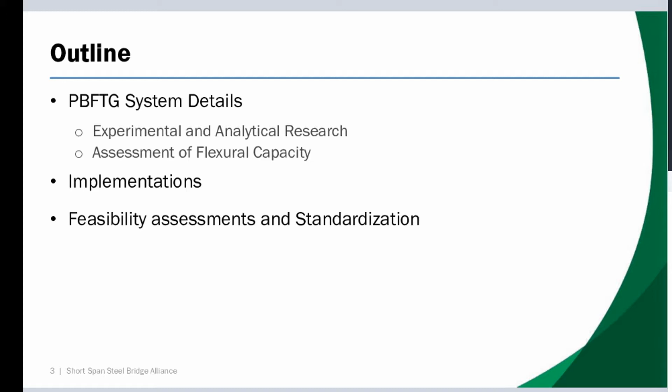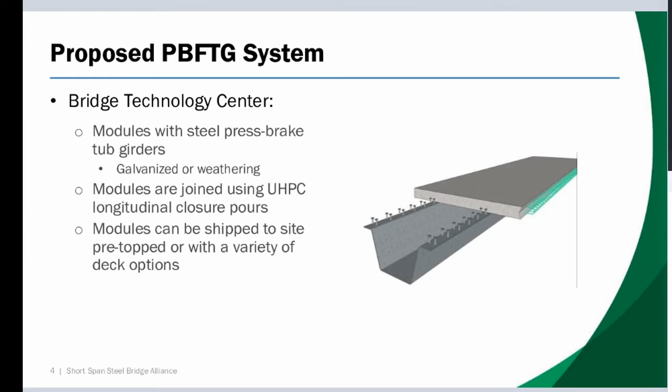But there's a variety of means by which you can employ a deck. You can bring the girders to site in a non-composite fashion and conventionally pour a deck. You'll see actually the first application that we did with the girder was done in that manner. There's also systems that utilize steel sandwich plate systems, and you'll see a demonstration bridge that we did that utilizes that. So there's a variety of different deck options that you can do with that.

So the work really came about as a challenge to the steel industry from the Federal Highway Administration to produce a structural shape that would be economical for modular steel bridge construction in the short span market. Myself and a number of our members got together in Chicago, about 7 years ago now, in a technical working group meeting to discuss various forms that we thought would be successful, and ultimately selected this as the one. Then we initiated at West Virginia University an experimental testing program to be able to assess and evaluate this technology and further develop it into commercial utilization.

So we take a standard mill sheet of steel, 84 inches, 96, 120, and we place several constraints on that. We have a top flange width, and we selected that to be 6 inches, so it was wide enough to get 2 shear studs on there. We have a bend radius of 5 times the thickness of the plate so that we are consistent with what will be the AASHTO specifications for that. And we use a conventional trapezoidal tub girder web slope of 1:4, which is what's normally employed in larger welded tubs. So given those constraints, once we then input depth, we can get the maximum moment capacity of the section.

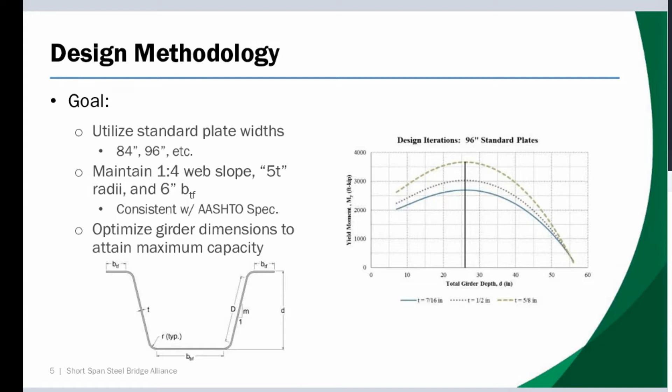We varied those depths and all other aspects of the plate geometry, and given those other constraints, everything else falls into place. We tried to determine the maximum yield moment we could get to optimize the shape. This plot shows a 96-inch wide plate utilizing various plate thicknesses, and you see that results in about a 26-inch deep plate.

We performed that same design for other common standard plate widths, which produced a set of girder depths for each. For example, you'll see later a double girder module we looked at early on using 60-inch plate, which gives a superstructure depth of 12 inches for the girder section itself.

I should also mention that if you go to the Short Span Steel Bridge Alliance website, there's a series of reports published there providing background information, section property data, and documenting all the experimental, analytical, and field assessments we did. It's quite a big amount of data. As you look at utilizing these systems, you can reach out to us or to our member partners involved in the commercial production, application, and sale of these systems.

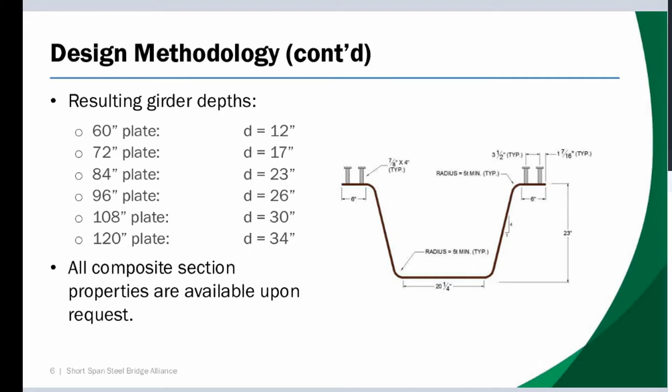Once we had done that, we decided we needed to do large-scale experimental testing, and we selected a plate fabricated from an 84-inch wide by 7/16-inch thick plate as the specimen for our laboratory. The main reason that one was selected is because we have a maximum applied load capability of 330 kips, and if we'd used a larger girder, we wouldn't be able to fail that specimen.

You'll see a plot in a few slides of the load deflection response for one of these specimens, where we're pushing 315 kips or so, which is an awful lot of load.

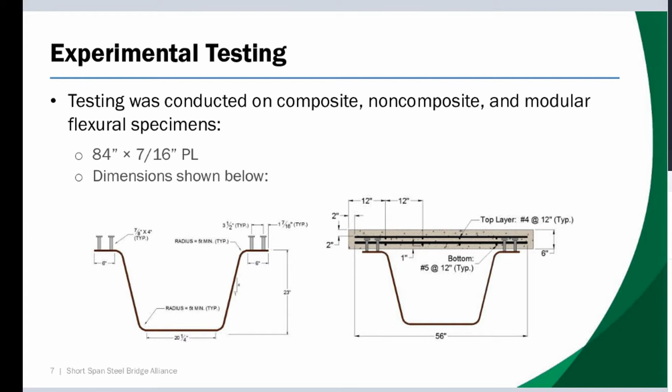We took the 84-inch wide, 7/16-inch plate and had it fabricated into tub girder dimensions, then placed a reinforced concrete deck on there to initiate experimental testing. We've tested composite sections, non-composite sections, multiple girder modules, and fatigue loading. We've run the gamut of possible scenarios for testing and evaluating that system, and it proves itself to be very, very robust.

Here is a series of pictures from the experimental testing. In the upper left-hand image, that's the production of one of these girders. Essentially, one takes a sheet of steel and places it in a large commercial press brake, putting four bends on it to create the top flange bends, then turns it over and bends to create the web bends.

Once you have the jigs and everything set up, you can produce the girders in less than 45 minutes in a typical setting. There are a number of commercial press brakes around the country, and most are limited to a maximum width of 60 feet. So 60 feet or less tends to be the sweet spot for these, but they're applicable to span ranges exceeding that, up to about 100 feet for certain plate configurations. One could just use an additional splice if using girders in lengths that exceed the available press brake width.

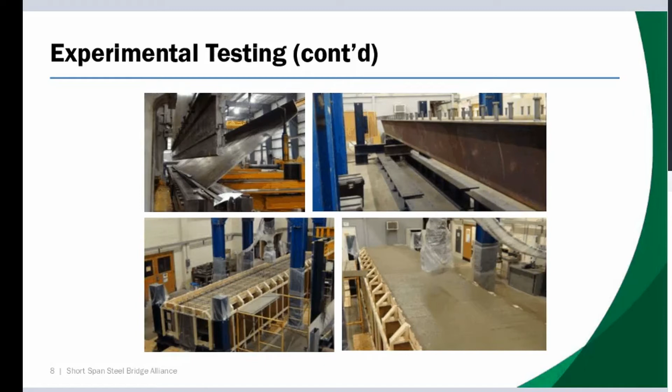What we've done in the lab to form the deck was simply use sacrificial plywood formwork. In a later application you'll see, done here in West Virginia on a challenging site, the material supplier elected to use this same forming method, and it was quite successful. You could use stay-in-place metal formwork or this sacrificial plywood formwork, whatever suits the project. We formed it up in the lab, poured a deck, and allowed it to cure for at least 28 days.

So we're testing that in bending in this particular test, to evaluate maximum capacity and the stresses, strains, and deflections in the girder and those types of things.

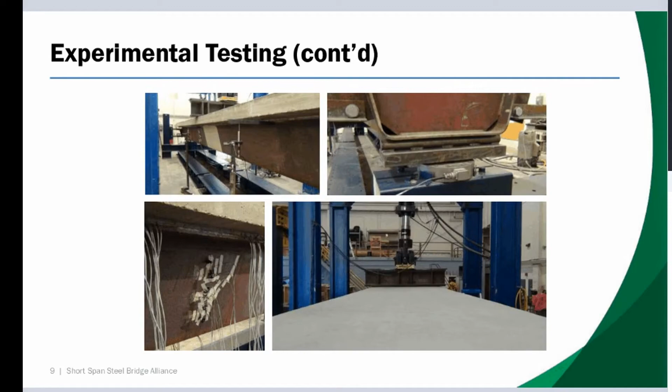Here's a neat shot - the left-hand image is the girder when it's reached its maximum moment capacity, and what you see is exceptionally small deflection. Once you have a closed tub girder shape, the moment of inertia is orders of magnitude larger than you'd get compared to a conventional I shape, so they're very, very stiff systems.

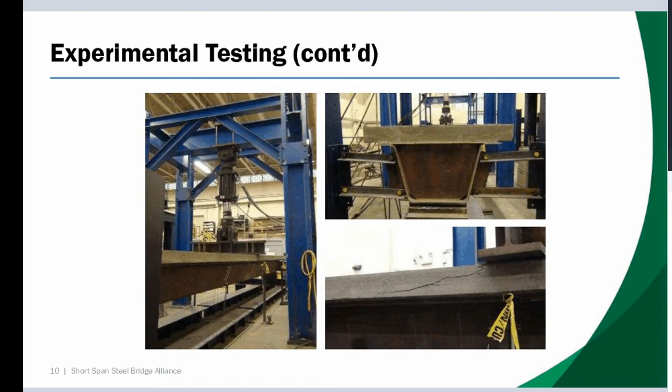You would start to see the concrete deck crack. You start to lose moment of inertia and get larger deflections. So this fails the same way as a conventional I girder would fail, through the ductility of the cracking in that concrete deck.

These, as you can see, are big tests to set up and conduct, and they take a long time to perform. So in order to research other aspects of these, we want to develop modeling that's successfully capable of capturing their behavior.

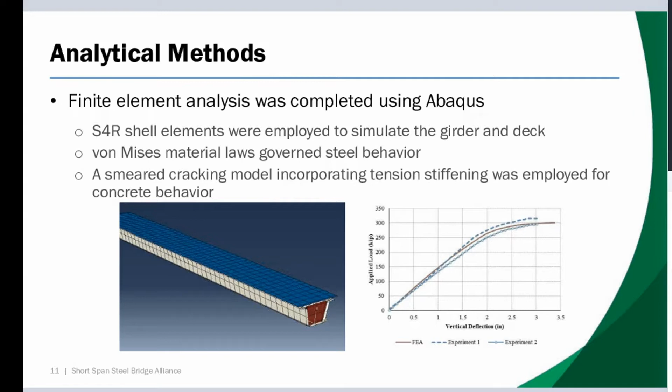And if you had a plot of I-girder ductility checks like this, you'd get that same conservative behavior there. So AASHTO conservatively predicts the maximum moment capacity of the section.

So we oftentimes get questions - well, how do you check the capacity? And we just use AASHTO 6.11 for tubs, and it's successful.

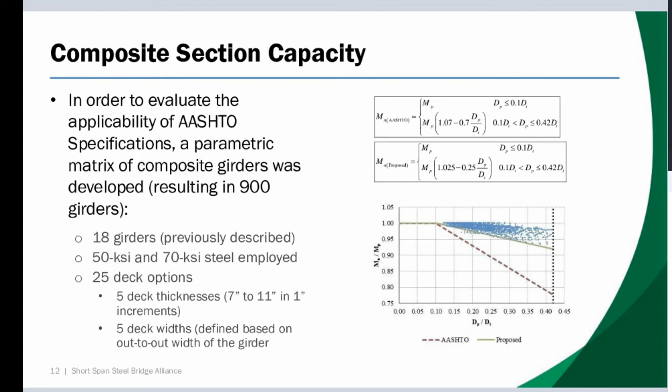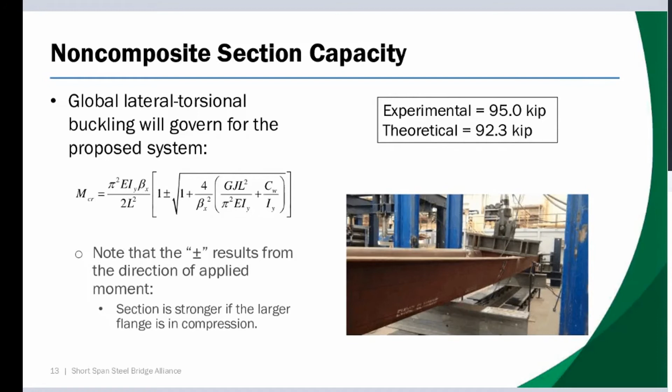We also wanted to look at the performance of joining these with ultra high performance concrete. So we did a 2-girder system where we wanted to evaluate the efficiency of that joint over the predicted lifespan of the bridge and determine how successful that would be.

We built on work done by Dr. Ben Graybeal at Turner-Fairbank, where he looked at a whole host of different edge configurations and mixes. We basically took the one found by Dr. Graybeal to be the most successful and employed it in this system to assess its capabilities.

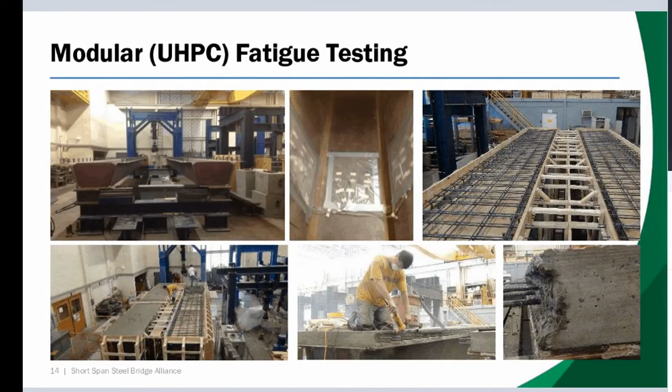Once those girders are set up, we move them close together so you're able to develop that joint over just a 6-inch spacing between the girders. Here you see the forming that's going on there.

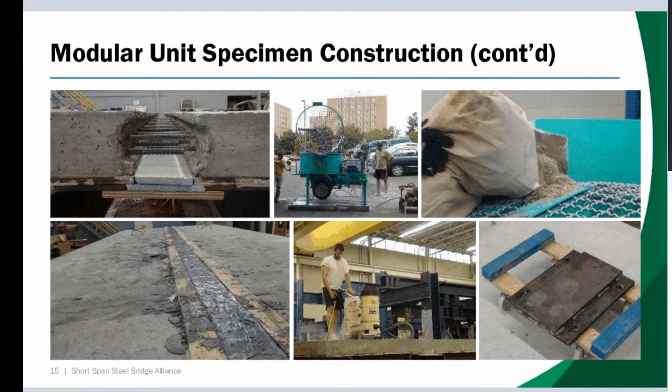And then for the application just completed in West Virginia, they had a grinder come out and grind the surface of the bridge, and you'll see an image of that.

We determined what load applied at midspan would produce the strength 1 moment, what load would produce the service 2 moment, and what load applied at midspan would produce the fatigue moment. We predicted the fatigue life for this, and it came out to be about 2.7 million cycles.

So what we did was apply that fatigue load over a range of about 100,000 cycles. We would stop that, and then apply the load up to the service 2 load, incrementing it in tenths of that load, and evaluated the stress and strains.

What you would suspect is, if the UHPC joint was not working, then over the life of that bridge you would start to shift more of that load away from the unloaded girder into the loaded girder. We found that not to be the case, which means that joint worked very well over the predicted life of that bridge.

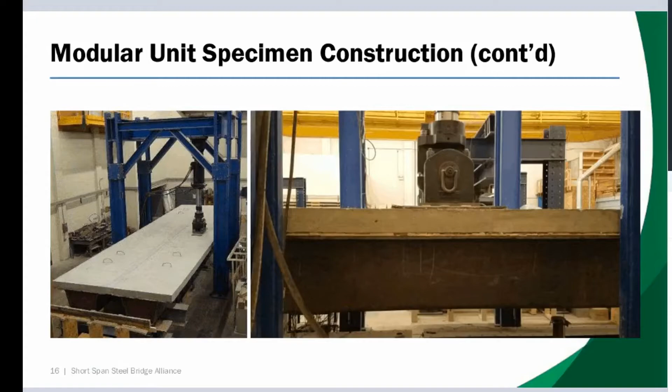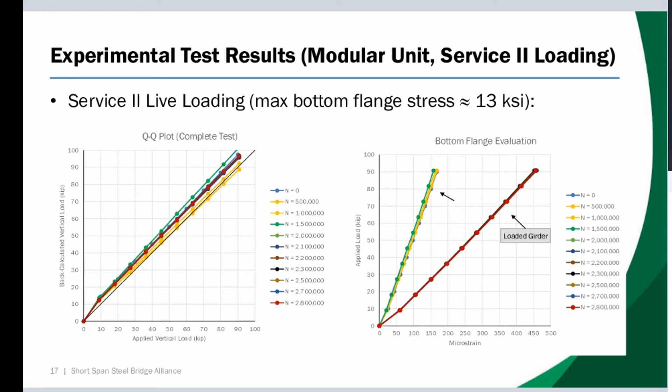There's been a number of applications utilizing that very successfully. This plot demonstrates that. What I'll key you in on is the right-hand plot: the loaded girder and unloaded girder, and the applied load versus strain over a series of loading increments—500,000, a million, et cetera, all the way up to 2.8 million. You see essentially no shift in the load pattern, indicating that UHPC joint was successful over the expected life of the bridge.

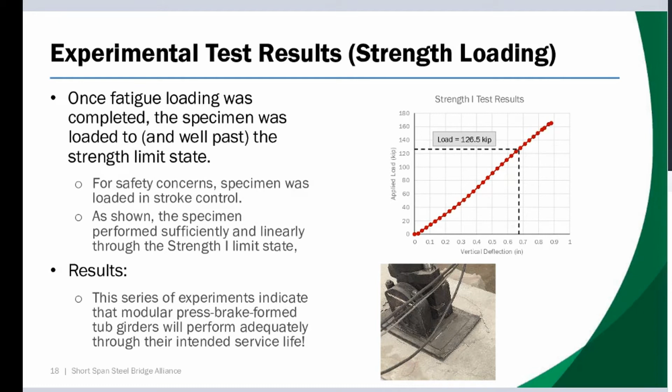This shows a plot of taking that up to failure. The predicted strength one load at midspan that would produce the strength one moment was 126.5 kips, and you see it behaving linearly up to there, continuing to exceed that load. Ultimately, because we chose a load pattern simulating the AASHTO wheel load size, this test failed through punching shear through the deck.

After the first three years of development and testing, we were able to put the first bridge in Buchanan County, Iowa. Brian Keierleber is the county engineer there, and he applied for and received a grant to assist in the construction. Here you see the image of that bridge and the ribbon cutting that was done.

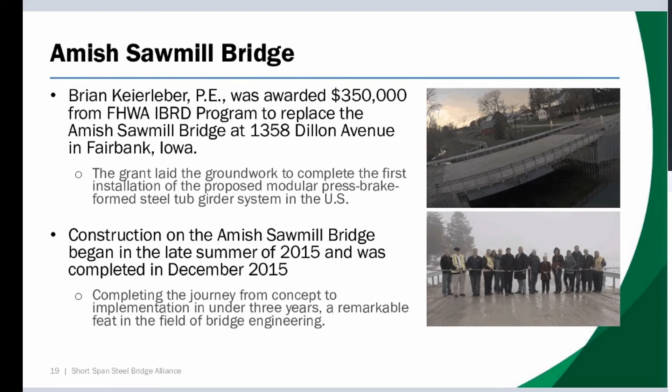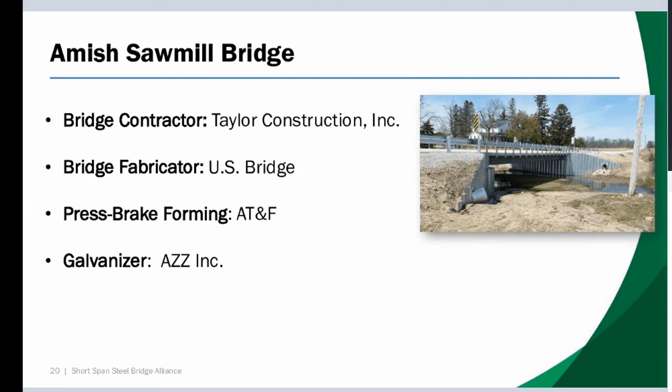We then went and performed experimental testing on that. These are the companies involved in the production of the Amish Sawmill Bridge: the contractor, the fabricator, the press brake former, and the galvanizer. They used a GRS abutment, and you can see that image of that GRS wall that's there for the abutments.

We went out and used a removable test system that we have, using wireless sensors screwed onto tabs placed on the bridge with adhesive. The left-hand image shows what one of the strain gauges looks like, with a wire coming out a short distance to the wireless node shown in the middle, which then sends the signal to the data acquisition system.

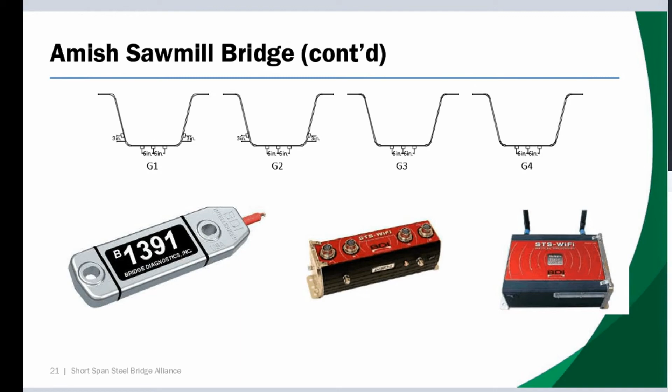So what we did was instrument the bottom flanges and webs of two of the girders. Then we took a loaded vehicle out and ran it both transversely and longitudinally along a number of lines that would maximize the load in a one-lane or two-lane loaded position for each of the girders, and then we looked at the distribution factors.

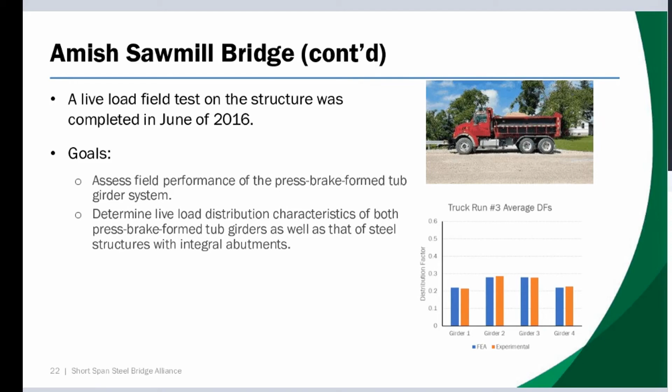Here you see those distribution factors being plotted for each of those girders. What we don't have on this plot is the distribution factor you'd see from AASHTO, but you would see that it would be conservative relative to this. So simply designing these as tubs from AASHTO is fine, but since we provide standards, you would not be designing these as one-off each time.

We've done several other demonstration projects. Here's one in Muskingum County, Ohio, and this bridge actually won a National Steel Bridge Alliance Technology Innovation Award.

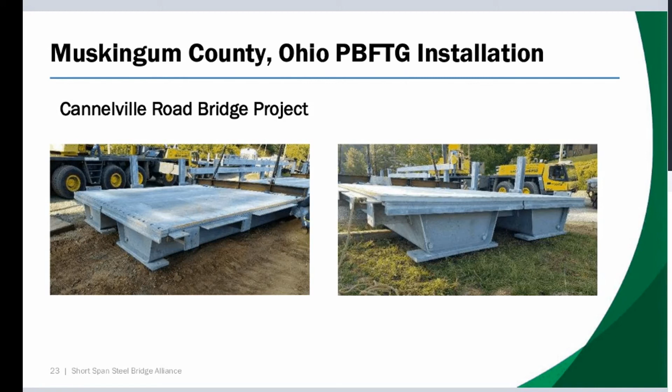This combines the tubs with a sandwich plate system. In this particular bridge, the entire bridge came out as two girder modules on one truck, and the contractor did the main erection in under 20 minutes. They basically picked one module up, set it on the bearings, picked another module up, and bolted them together, completing most of the superstructure in under 20 minutes. When we talk about accelerated construction, I don't think we can get much quicker than that.

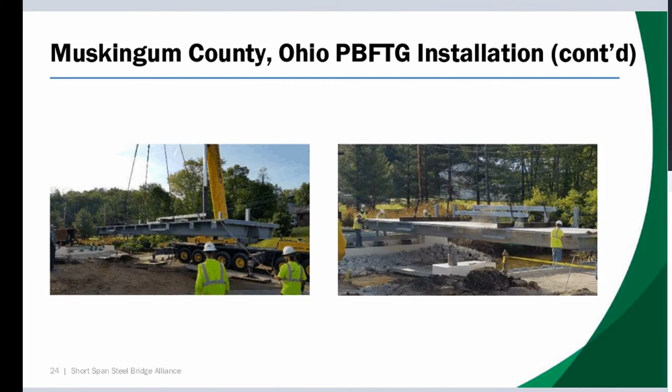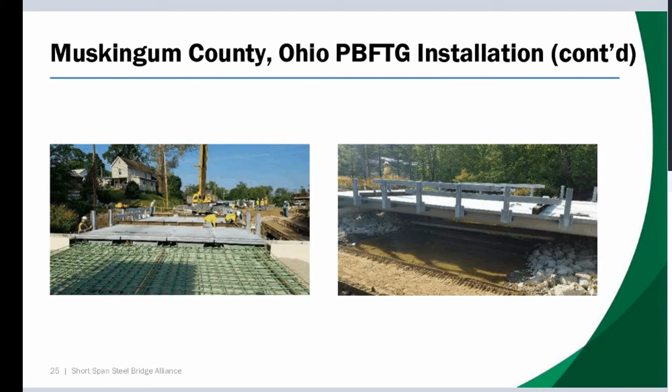We similarly performed experimental testing on that. Here you see a couple of images of them picking those modules up and placing them, using the same removable data acquisition system and employing the same testing we had done before. Here you see what the bridge looks like once those girders were in place, and in the right-hand image the railing being bolted onto the posts on the edge, along with the forming of the approach slabs.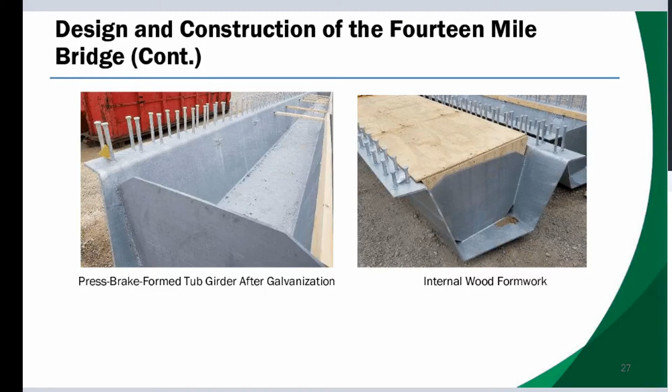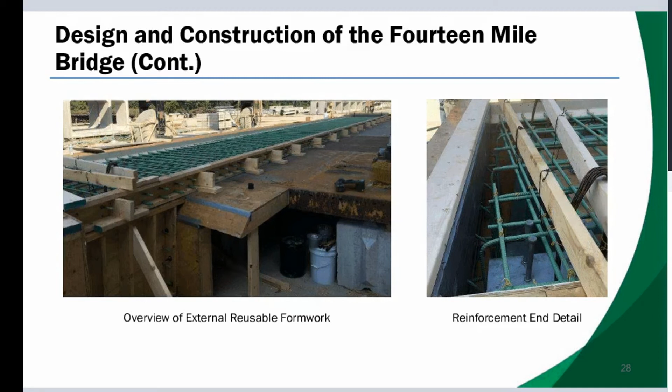Here's forming of the deck. They used reusable formwork on the outside of it. You can again see that skew in the right-hand image. And you see that rebar coming out from the deck forms, where it's going to be employed in that UHPC joint. So this was a very successful application of the girders.

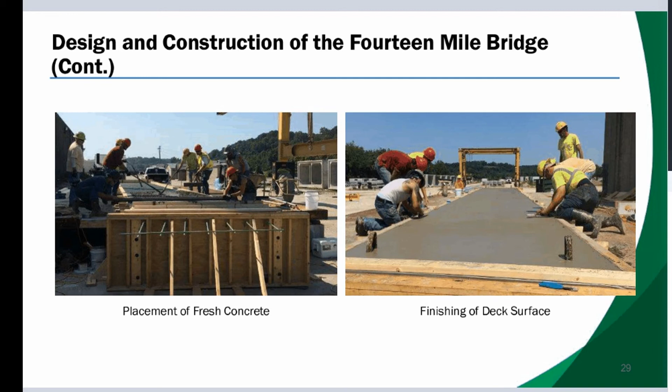Here is them placing the deck and then finishing that. And then you'll see a couple of images of that bridge being erected.

In this application, the bearing seats were poured integral with the girders, and you see that module being brought out to the site. There were 5 girders, and they came out as a single girder on 5 different trucks. They simply lined the trucks up, took one girder off and placed it, and that truck would move out of the way and they would bring the next truck in.

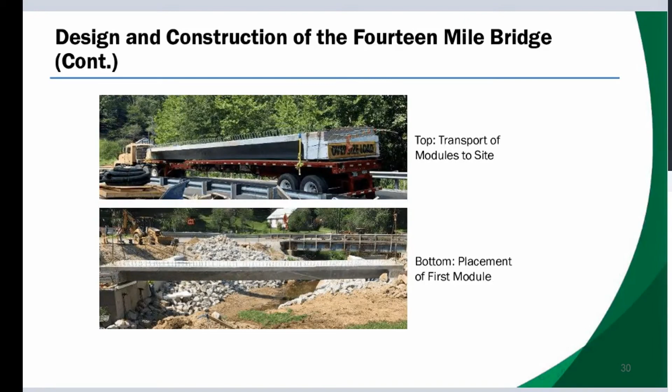So you see that first module being placed on the abutment back walls there. Here's a couple more images that demonstrate the site - you can see the skew on the site, and that truck being brought around through a temporary bridge. It was kind of cool - the DOH brought out a drone to do some aerial recording of this, and that video is really pretty neat to see.

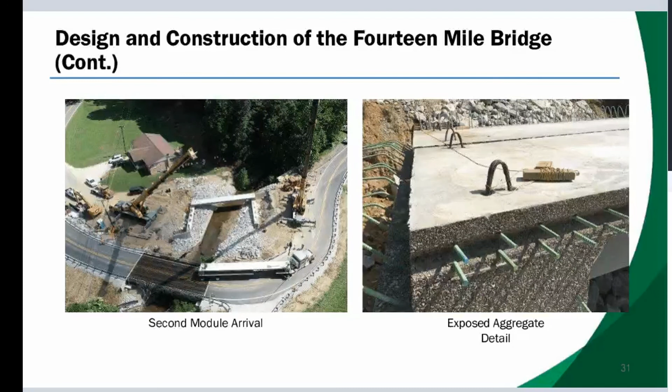You see on the edge of this where one of the modules is next to another one, that exposed aggregate detail that was discussed in the laboratory work to be able to adhere the UHPC to it. And here's them pouring the UHPC into the joints. The contractor was able to successfully do that. Then you see them using a diamond grinder on there to finish it.

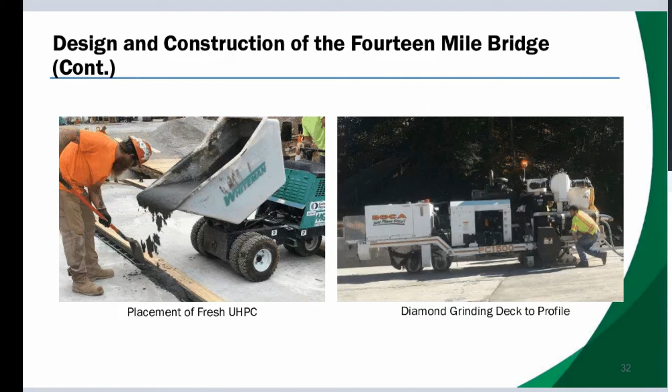We have one other demonstration project going on in District 4, and that should be going in the fall. A number of our members involved in this have placed numerous other ones of these bridges very successfully. It's a super economical and super robust system to use. I would suggest whenever you have need for bridges in the span range, that this is something to definitely be considered.

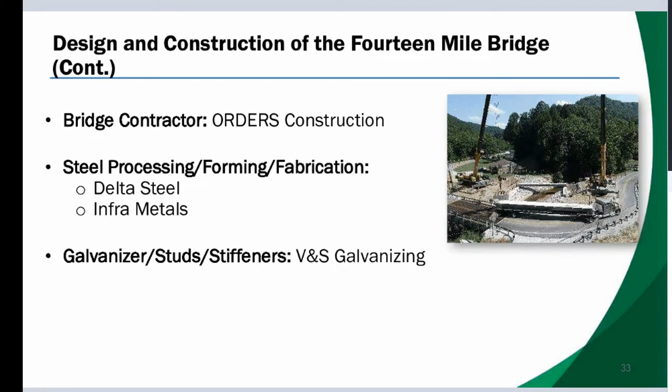These are the people who were involved in that West Virginia bridge - you see the contractor, the steel supplier and fabricator, and then the galvanizer was V&S Galvanizing.

One of the things I've alluded to several times is you don't need to design these every time. We want to move as an industry, not only in the tubs, but with I-shaped girders, plate girders, and wide flange sections into the notion of standardization. So we'll have 3 different span ranges in which a different section is recommended to be utilized.

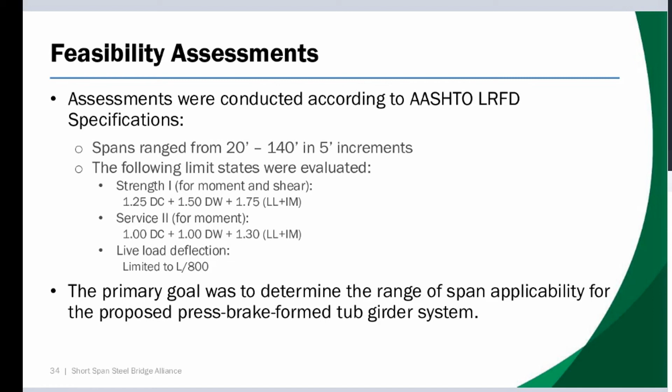What we did was simply vary the span range from 20 to 140 feet in 5-foot increments and look at all of the applicable AASHTO limit states for those, in order to try and determine the span range of applicability for those different plate widths shown earlier. That results in a series of plots like this - this is just for the 96 by a half. What you see is demand versus capacity, and wherever the demand in blue exceeds the capacity, that would be the maximum span range applicable for that given limit state.

So, for example, you look at shears. There are two webs, so you never exceed shear capacity. They're just buku strong for shear.

You see in the upper left the plot of capacity versus demand for strength 1 moments, and demand passes the capacity at just over 60 feet, around 63 feet. So that would suggest that utilizing the distribution factors we utilized and that plate size would be applicable for spans up to 60 feet.

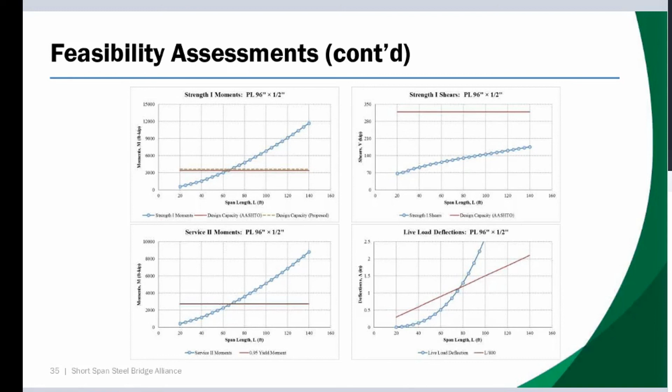So the shortest one of those would be the maximum span, right? Wherever you violated a limit state first would be the maximum span you could utilize.

So here you see for all those different plates that we had discussed early on, a series of plate thicknesses, and the AASHTO versus a proposed limit state that we had worked on early on. Because AASHTO worked so well, we've not worked to advance that. So that's what the red and blue are, a limit state we developed from that cloud of data. But I'd key in on just the AASHTO plot for each of those.

And so you see for those different plate thicknesses and plate widths, maximum span ranges of applicability. In all but one case, they were controlled by strength. There was one, the 84-inch wide 7/16 inch plate, that was controlled by live load deflection, but that was the only one.

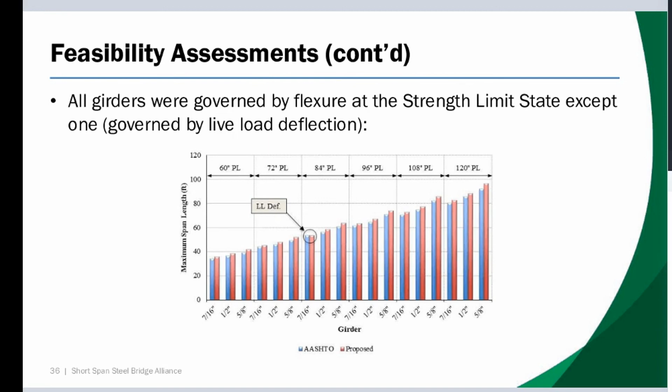We then turned to work produced by Chris Garrell and others at NSBA that looked at plate size availability. You see that for the 72, 96-inch plate, a half inch is available up to 972 inches, and most mills produce a half-inch plate, so it's virtually available every day. People ask about steel availability, and when you're talking about standard sizes and thicknesses, they're virtually always available.

We increased the thickness from a half inch to 5/8 for the 120-inch wide plate, not because it was necessary from a structural capacity standpoint, but from a material availability standpoint. You see that the 120-inch wide plate in half inch is only available up to 750 inches, and by moving to 5/8, it gets it out to 972 inches.

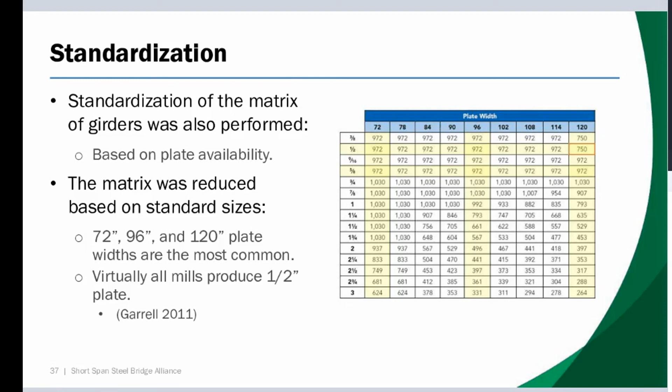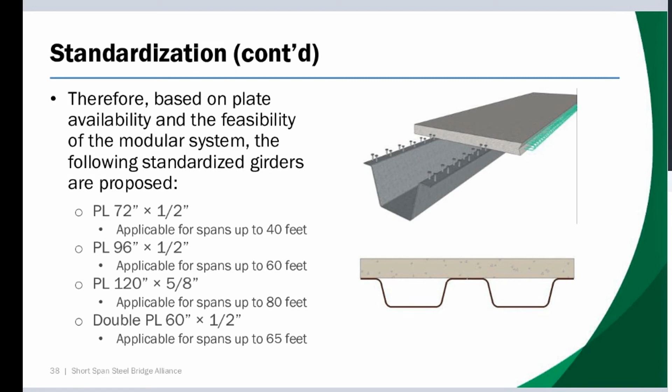So what you see then are those ranges of applicability for the different plate sizes. We produced a series of drawings that are going into our online software called eSpan. If you're not familiar with that, I believe Dr. Barker would have talked about it in one of the earlier presentations. But it's an online design, or an online standardized tool that we have available, and this is going into an update in that.

And you see these different standard plate sizes. So if you have a design that's less than 40 feet, you'd simply use this plate. You wouldn't, if it was 37 versus 36 feet, go in and design that each time and try to resize your tub accordingly. You'd simply select the tub from a series of standards based on what your span range was. Standardization just makes sense for a whole host of reasons.

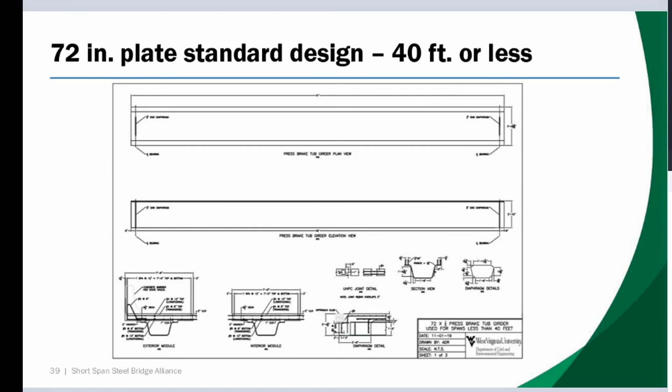And so here's a common range, the 96-inch plate, and it's applicable from 40 to 60 feet. So again, if you have a 47-foot girder, you're not going to come in and try to resize the tub and design specifically for that. You're just going to take the tub girder design that was standardized for the 60-foot section and utilize it for that.

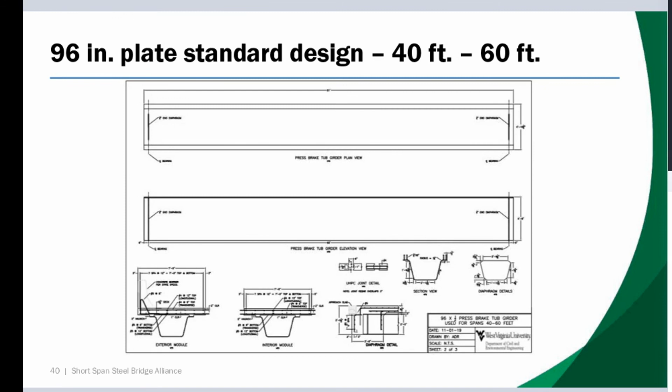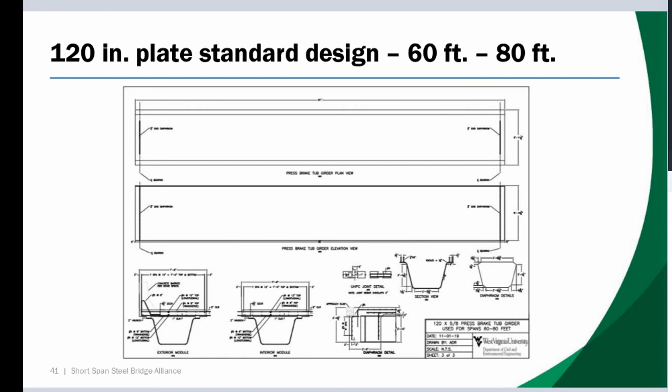So in each of these three sheets, we have recommended deck detailing, and abutment detailing similar to what you saw in that bridge done in District 2. We also have a tub at a 120-inch wide plate that's applicable from 60 to 80 feet. Again, you would find that most common press brakes were not longer than 60 feet, so you would need to use a splice, and you would just use AASHTO splice design, designing it as though it's a common bolted field splice.

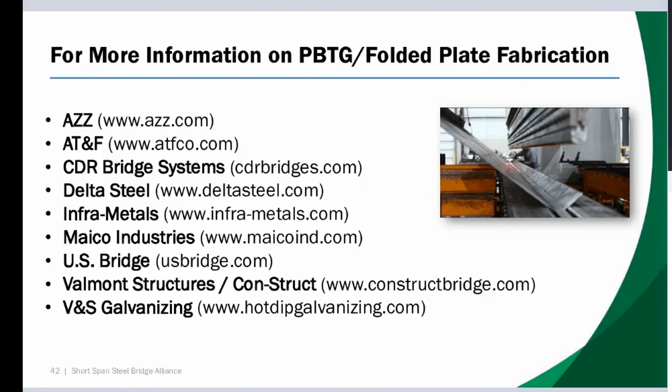Here's a number of our members who are commercially involved in galvanizing production of the girder systems themselves, and have also independently put quite a number of similar girders out there. So I reference you to them for further information, or don't hesitate, if you're evaluating this system, to work through us at the Short Span Steel Bridge Alliance Bridge Technology Center, and we can help point you in the right direction with technical inquiries and help you assess this system for your projects.